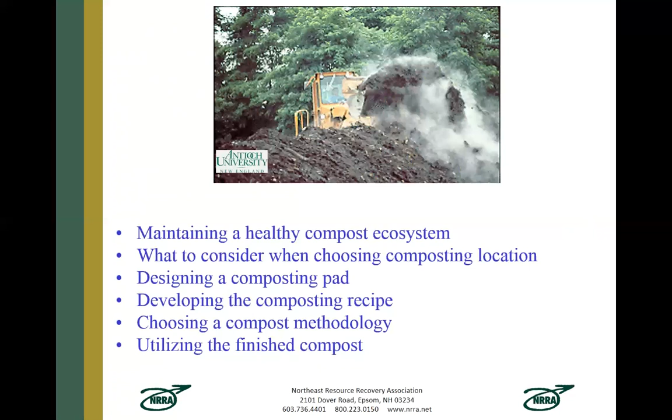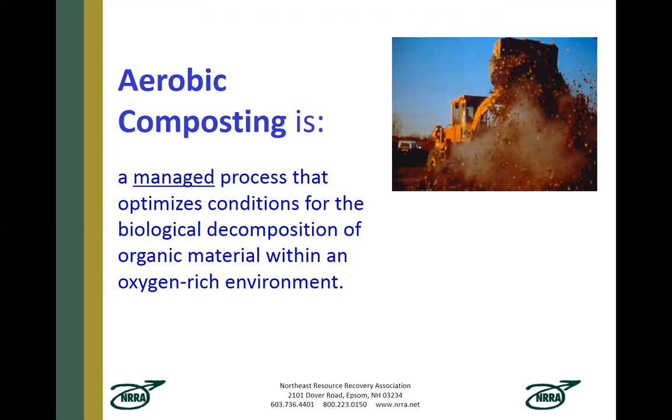But first, let's just get down some basic definitions. Aerobic composting, from a solid waste manager's point of view, is a managed process that needs to be paid attention to so that the organisms in the composting pile get what they need. In this case, it's aerobic, which means they need oxygen in order to decompose in an efficient manner. The finished product, compost, resembles a soil, but it's actually a soil conditioner. We're going to talk about how to produce it so it can be safely handled and stored, and so end users will be happy with the product.

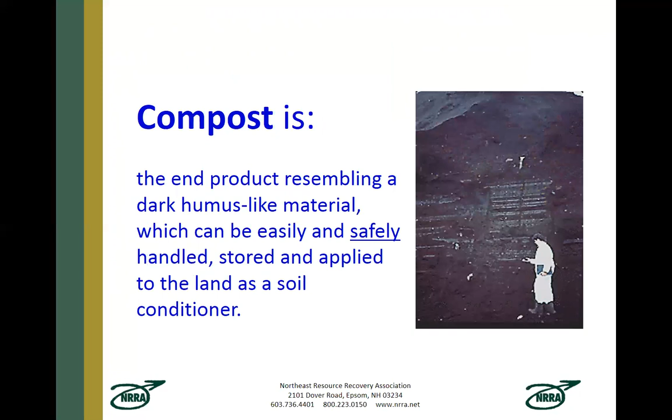Now, the organic fraction of the waste stream can be significant. And if we exclude paper, which is organic, it still could be as high as 70% of the residential waste stream.

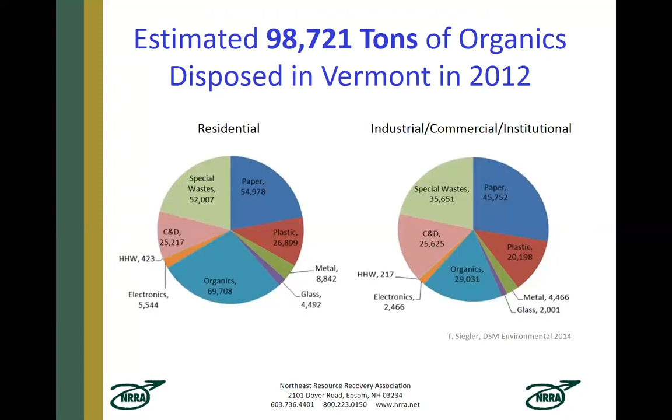Now, currently in the US, large-scale facilities that take in organics range from yard trimmings or yard waste and grass being the largest number of facilities, but in part this is because 25 states in the country have landfill bans not allowing this material to be disposed.

Of the 5,700 facilities approximately, 4%, or 225, do take in food waste already, but they mix that with yard waste also.

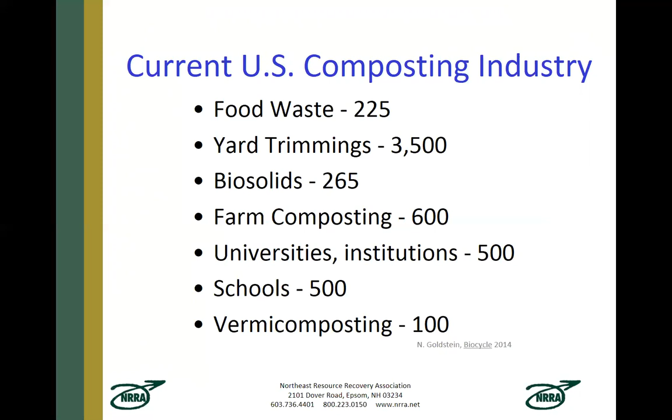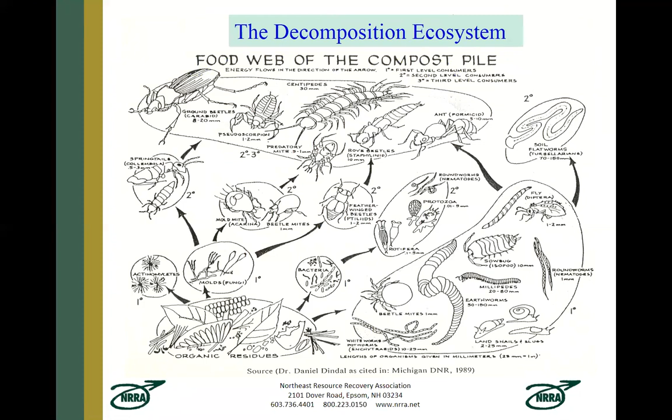Now, the most basic understanding of a composting process that will ensure that it's sustainable is that you need to realize that it is an ecosystem with a whole set of living organisms that evolves and changes over the period of the composting process.

Now, these organisms are like us. They take in oxygen, they give off moisture and carbon dioxide. And if you put them in a pile, the respiration activity, the living activity of these organisms will also release heat, and the pile will insulate the heat and it will start to get hot.

If you're composting correctly, the temperatures in the center parts of these piles should be getting up between 130 and 140 degrees Fahrenheit. This is termed the thermophilic biologic range, okay? And the organisms that can live at these high temperatures are called thermophiles.

Now, this high temperature is actually an advantage for a number of reasons in a composting operation. One, the organisms that live at these high temperatures are specialized and quickly break down substances like cellulose, which are hard-to-break-down complex organic molecules.

Also, these high temperatures will kill pathogenic organisms so that the final product is safe to handle. It also kills weed seeds, and you really do not want this in your final compost product.

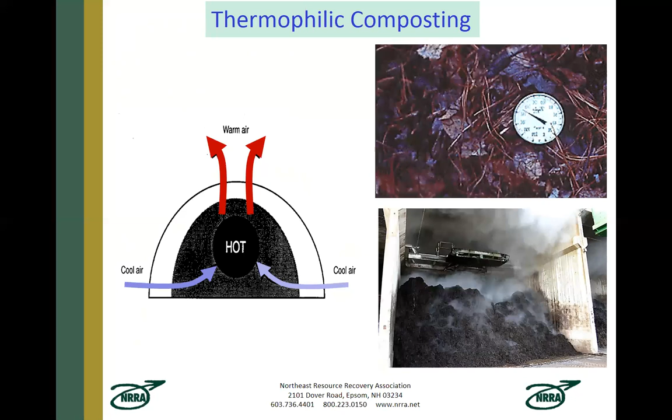And it will control vectors such as insects and flies, because the high temperatures with mixing will kill all the eggs and any pupa that may be forming.

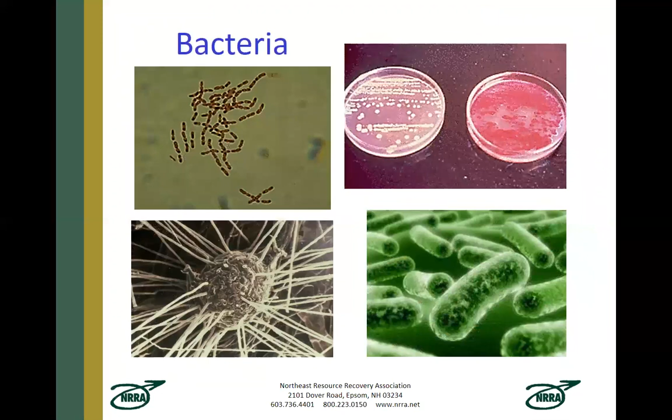Some of the organisms that are in this biological film that is inside the compost pile are fungi, many types of bacteria, and then there's Actinomycetes. It has characteristics both of fungi and bacteria, but it's actually a life form in a class unto itself.

Now, all these organisms optimally like oxygen, and they do their best job in an oxygen-rich environment, but they also need moisture because they actually live in the water film that surrounds the composting particles, and that's how they decompose them.

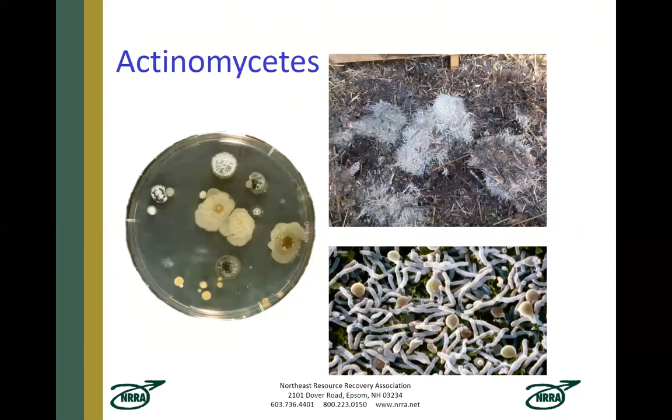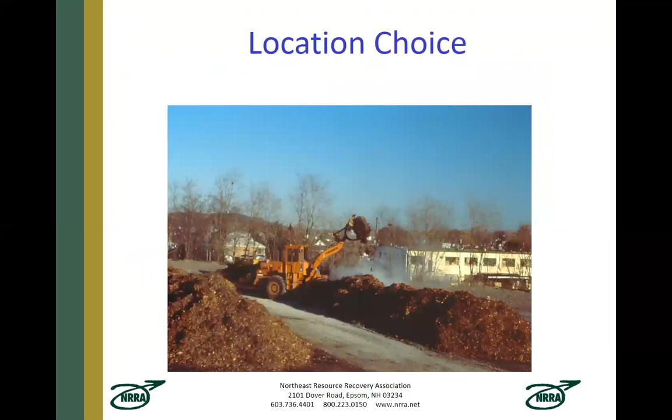So now let's get down to some practical considerations. First, how does one find an appropriate location for a composting operation?

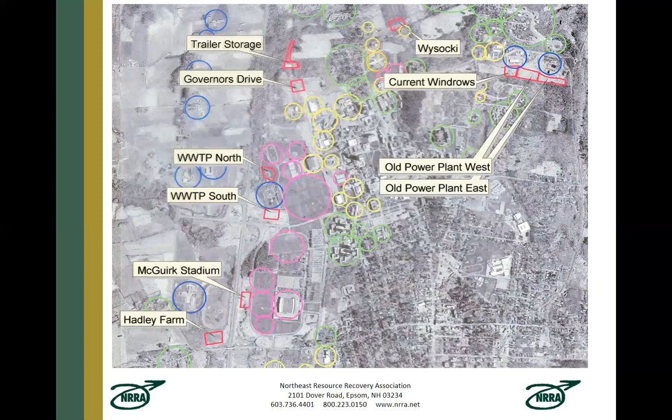Now, to narrow this list down to what we consider the final choices, we use something called exclusionary criteria. Some of these criteria reference regulatory siting requirements, such as required distance from surface or groundwater.

But also, some reflect actually context and where the development is in relationship to valued natural resources or other developed areas next door.

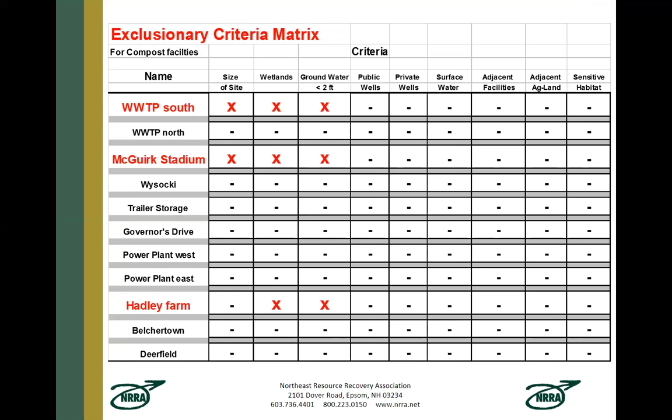The exclusionary criteria creates a short list, and then we move to a second round of criteria called preferential criteria. These criteria are developed in collaboration with a community based on the preferences.

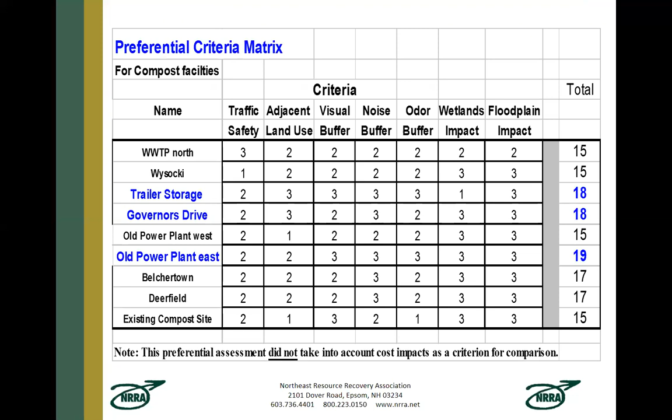And I want to focus on one of these specifically, and we'll be addressing this throughout the composting presentation. And that is the criteria of the potential of odor impact.

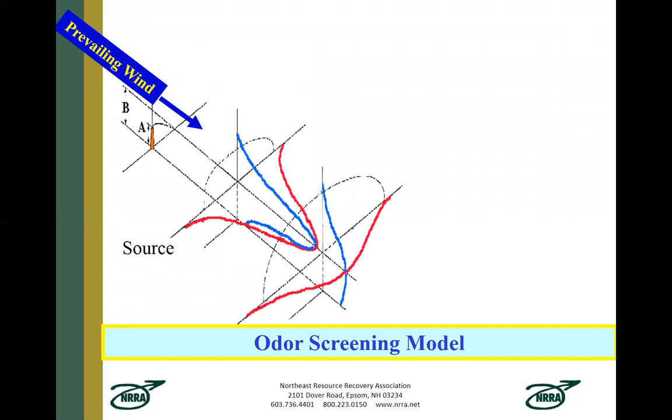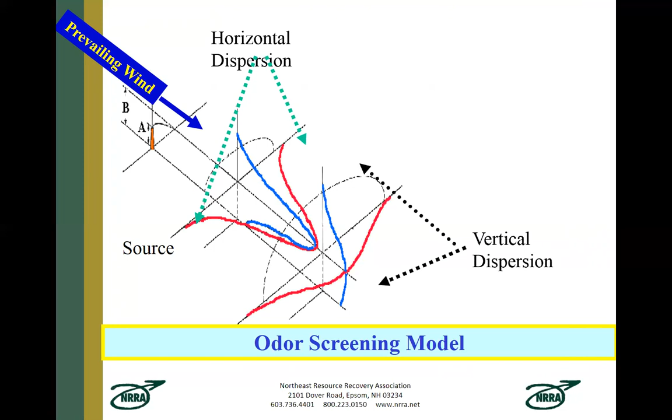All composting facilities create odor, okay, so they're a point source of odor that is dispersed by the wind over distance. So usually you're interested in where the prevailing winds are going and taking the odor.

But just because composting facilities create odor, the question is, will they have impacts? And that really depends on how close sensitive receptors are. Because over time, as the wind blows, the odors are diluted.

So what do I mean by a sensitive receptor? Well, this may be a neighbor, such as a school, a daycare facility, a hospital, a retirement community. Or it could be even a community park that is loved by many and there's many people that come to it. Or it could be a high density residential area.

So mapping out where you potentially would have such impacts is important in order to create a short list of possible sites for composting.

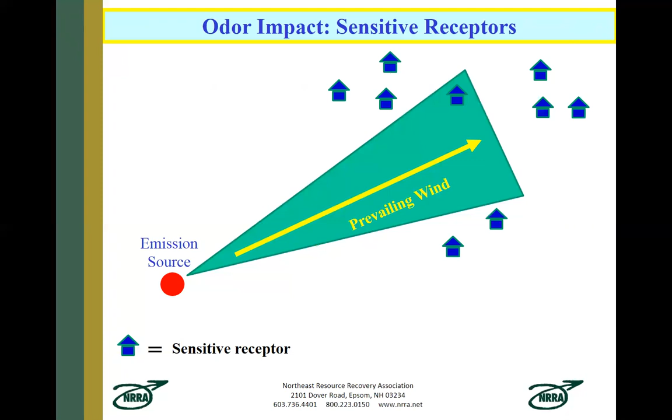So now let's turn to choosing the proper composting method for a specific site.

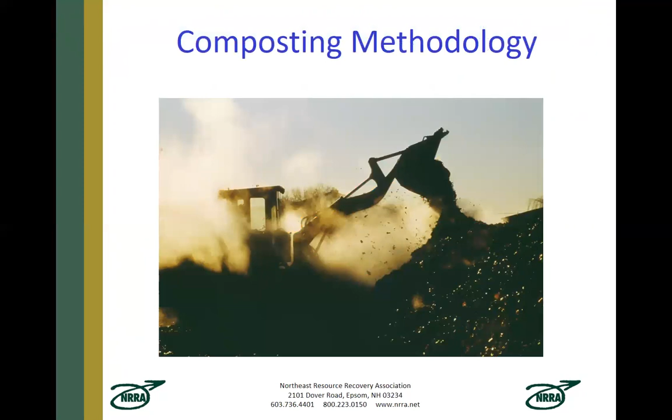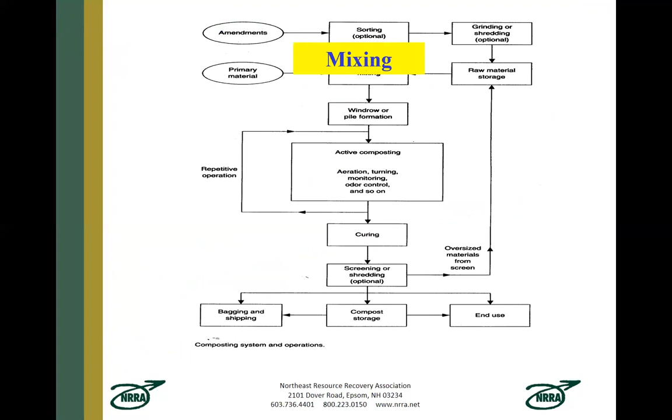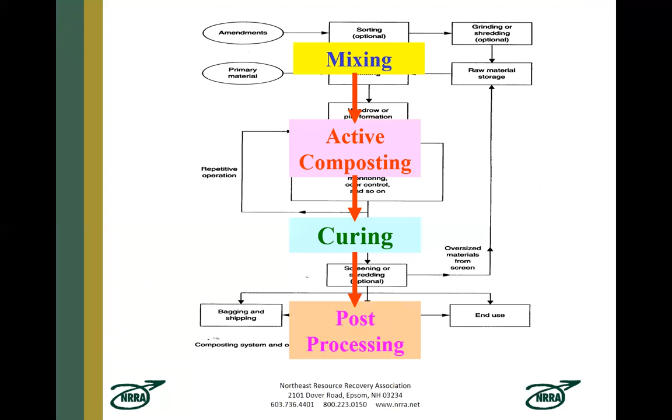Generally, all composting methods have some permutation of four steps. There's an initial mixing step where the recipe is created. There's the active composting process, which comes in many forms. There's a finishing step, what we call a curing step, that allows the compost to be at the point it can be applied to land. And then there's usually also a post-processing step, and this is really driven by the specifications of who's going to use the compost and what they're looking for in a final product.

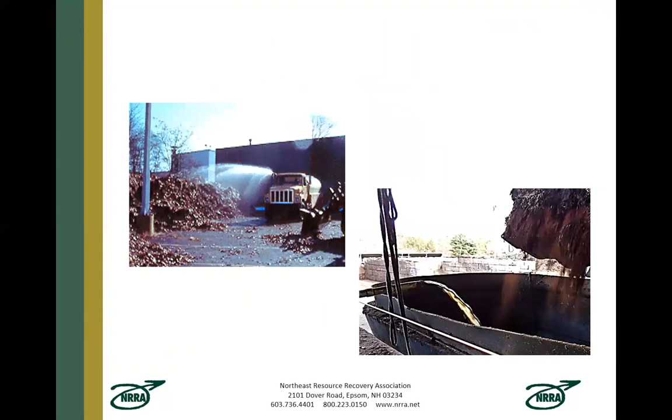Now, in the mixing step, one of the earlier challenges is balancing moisture and oxygen. As I said, those microorganisms need both. And so to really understand this, let's get down to the particle size. These are organic particles, and around each particle there's a biological water film. And it's inside those films that those organisms actually like to live, and they actually decompose the organic particles on the surface.

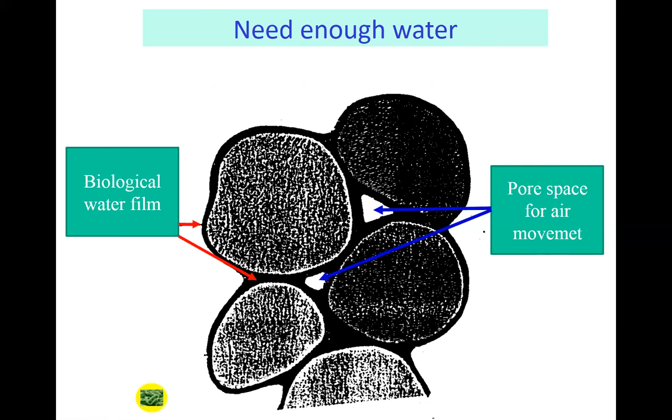So the more surface area, the faster the decomposition. But at this level, you also need enough porosity or pore space between the organic particles to allow for good air circulation. The reason being is these microorganisms are in there and they need to get oxygen to them quickly. So you need a combination of this biological water film and the proper porosity to allow aeration.

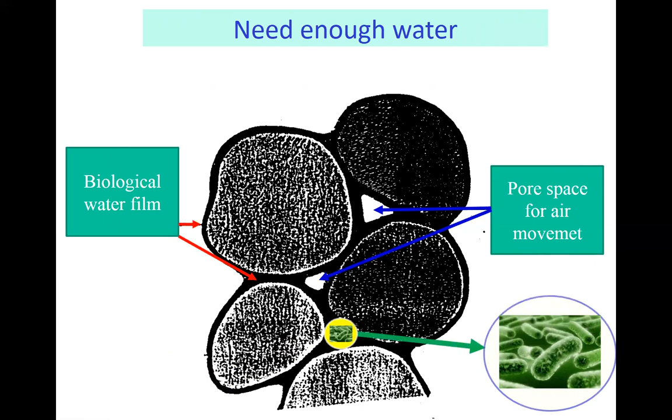Now, if a pile gets too dry, there will be no place for the microorganisms to live. And as a result, you'll see a slowing of the decomposition of these materials, and it will cease altogether if the pile gets really dry.

Alternatively, if it gets too wet, it will diminish the ability for oxygen to circulate and get to the organisms, causing the whole system to shift from an aerobic, or oxygen-rich, to an anaerobic, oxygen-poor environment. Now, anaerobic microorganisms, which can live in this low oxygen, unfortunately are not good decomposers. The decomposition process will significantly slow, and also some of these anaerobic organisms produce odors.

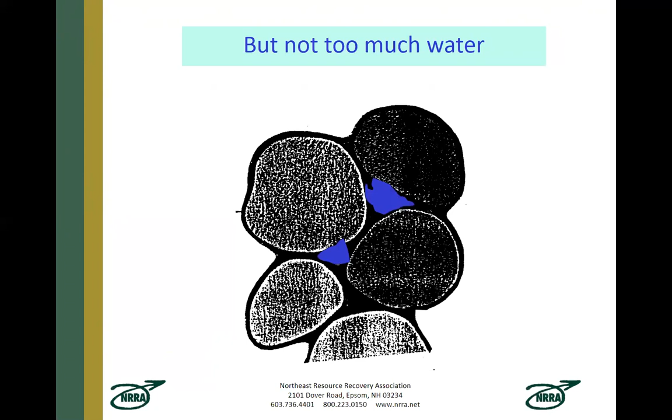So what is the right moisture content so that we get the right aeration? Well, generally you want something at around 50% by weight moisture. A good way to tell if you have 50% saturation is to grab some compost and squeeze it as hard as you can, and if a little drop of water forms at the bottom of your fist, it's around 50%. So that's a good field test.

Now, you can be within a range around 40 to 65% and still have composting occur. 50% is where it's most optimal. But if it drops below 40%, it's going to slow because it's too dry and there's no biological film. If it gets above 65%, there's not enough porosity because all the pores are filled with water, and you'll move into anaerobic composting. It again will slow, but in this case, you'll get odors.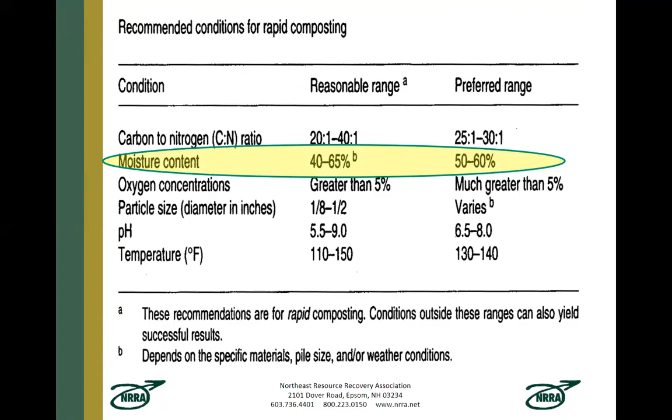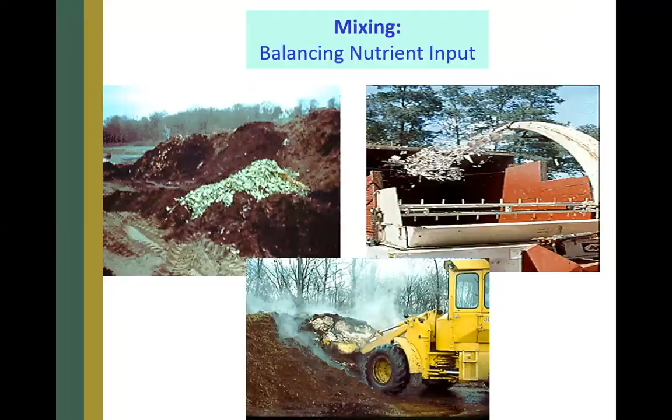Now, another challenge as you create the recipe to put in a composting pile is to make sure you get the right nutrient balance. And really, what we're looking at is two major nutrients: carbon and nitrogen. Now, the carbon provides the energy for the microorganisms to do the work, and so if you have enough carbon, they have enough food, and you're going to see good decomposition. But at the same time, they need enough nitrogen, which are the building blocks of life for these organisms, so they can grow, reproduce, and actually have large populations, so the decomposition rate is quite fast.

So you need an ideal carbon-nitrogen ratio. And you can see, looking at this list, that it can vary quite a lot, from something like wood, which is 700 parts carbon to 1 part nitrogen, all the way down to something like food waste, which is 15 parts carbon to 1 part nitrogen.

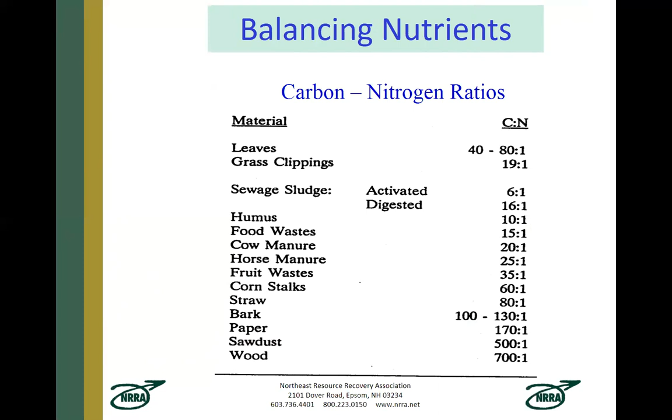So what is the right ratio? Well, to do that, you bring in different types of organic waste and you mix them so you can try to get an ideal mix ratio. And that is, you want something around 25 to 30 parts carbon to 1 part nitrogen.

Now, if you get more carbon, if you get greater than 40 parts carbon to 1 part nitrogen, you have a lot of energy, but you don't have a lot of nitrogen in order for those organisms to reproduce and the populations to grow. So you'll have a slow composting process, and materials will have to be on site much longer.

However, if you have something less than 20 parts carbon to 1 part nitrogen, you actually don't have enough carbon. It will be used up really quickly, and the piles will get hot. And as a result of the hot piles, the excess nitrogen will turn into nitrogen odor compounds, and you'll get odor release.

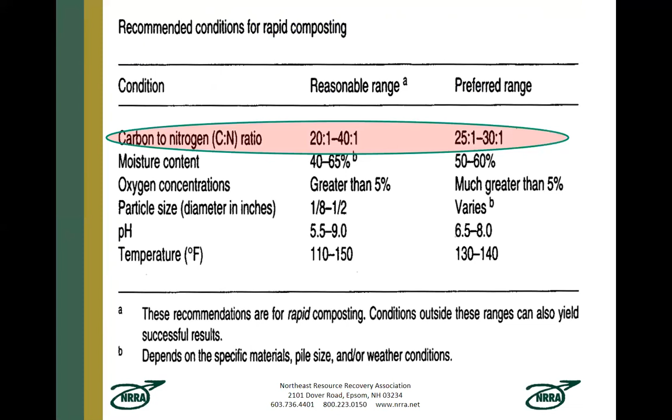You want to avoid being above 40 and below 20 parts carbon to nitrogen in order to have an efficient composting operation and to avoid odors.

Once you get the materials mixed and in the piles, what is the right methodology for composting? The choices you'll make are: how do you want to aerate that material? How do you want to ensure that oxygen stays in that material? There are many ways of doing that. How do you want to continually mix the piles? Because you want to make sure hot temperatures touch all parts of the material at some time.

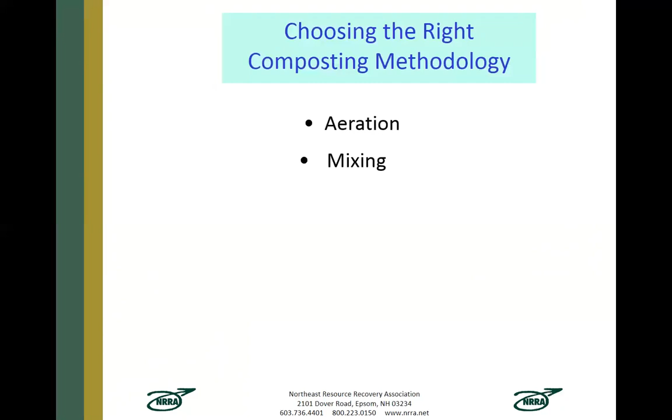Do you want to size reduce? Remember, decomposition by microorganisms is a surface phenomenon. So if you increase surface area by making smaller particles, it will speed up the composting process.

Obviously, seasonal issues and changes in droughty and wet conditions, as well as hot and cold conditions, are important to consider, especially here in the Northeast. And then there are site constraints. Once you've chosen a site, you're limited, and you'll only be able to accept so much material based on the composting method you choose during the year.

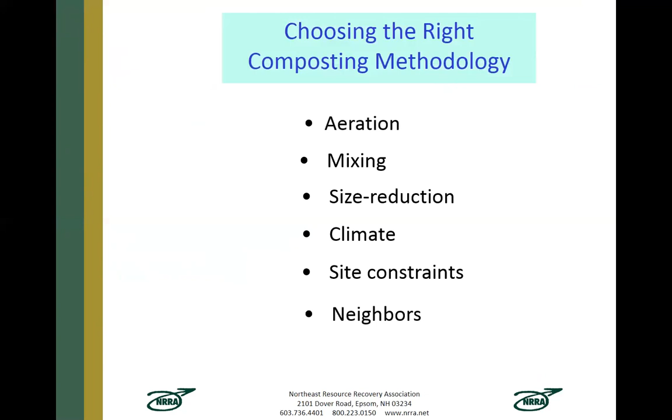And then, as I said, what is the context? Where is this facility located? And what do you need to do to make sure there are no impacts emanating from the facility that could affect your neighbors at some distance? Obviously, cost is always a consideration, but it's really related to all the decisions above that you make about the composting operation.

Most people are familiar with this type of composting, called windrow composting. You put your materials in a long row and use a piece of equipment to turn it. Most communities have something like a front-end loader. Operating a front-end loader with a windrow system, it's important how you turn the piles.

Not only are you releasing the carbon dioxide and water vapor, the byproducts of aerobic respiration, but you're also getting oxygen into the pile and mixing it so that everything is at some point at the center in a thermophilic range. Now there is specialized turning equipment.

Some are attachments, such as this Wildcat turner, and it can be pulled with anything that has a PTO drive. What it does that a front-end loader can't do is size reduce and increase surface area, allowing a more rapid decomposition process.

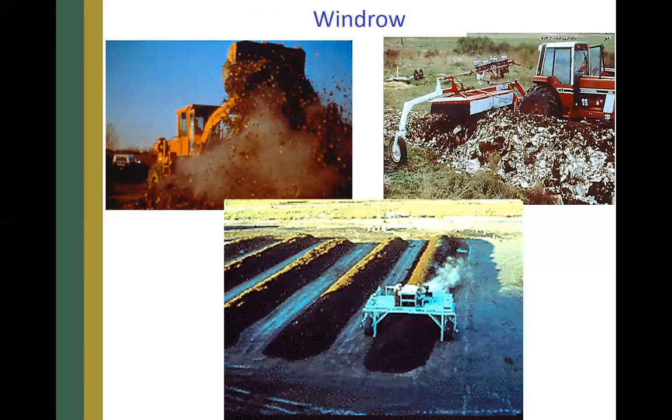You can also have self-drive turners, such as the Scarab at the bottom. They do the exact same thing as the Wildcat, but what's different is they can compost larger operations efficiently, and they have the capability of adding water to the pile as it's being turned, in case you need to do that.

There are many what we call static aerated pile systems, where you're actually only turning the pile maybe once, and you have two phases: a phase one static aerated pile, and then you flip it into a phase two.

You put down pads that have pipes — they can just be plastic pipes with holes — and then you put the material over it. These pipes are attached to a blower. So if you're going to have a static aerated pile system, you'll need an electric source. These blowers blow air through the pile, or they can suck air through the pile, depending on the time of year.

Often they're covered with something, either a geotextile or what's now called a gore cover, which allows carbon dioxide and moisture to be released from the pile but limits the amount of rainfall going in. But most of them use finished compost — they'll put about 2 feet of finished compost on top of the piles, and the compost insulates the pile so the whole pile is now in a thermophilic range, that high temperature range, allowing rapid decomposition.

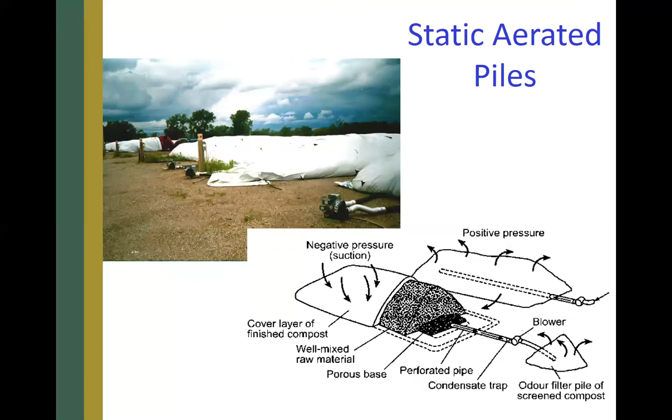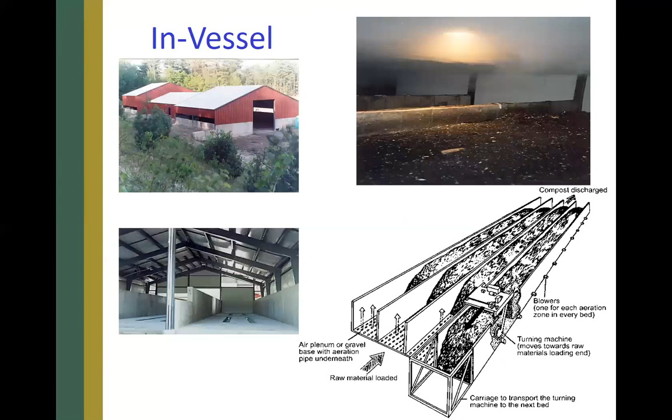What's interesting about an in-vessel system is that you can actually capture all of the emissions coming off that pile, including odors, and route this material through what we call a biofilter. It's another biological system where bacteria clean the odors out of the air. This is a great alternative if the only site you have is right next to some sensitive receptors.

The appropriate sizing of a site is really driven by how you start your decision making. One decision is that you've chosen a site because that's all you've had, and that immediately drives how much material you can bring onto the site, how fast it decomposes with the methodology you choose, and how much storage capacity you have before you have to start moving materials off the site.

So starting with the site limits, the material being accepted. Or you can decide that you need to serve a certain waste shed, which determines how much material you'll handle. Then you look for a site with a certain composting methodology in mind that's large enough to handle an annual amount of material coming on and getting the compost off the site.

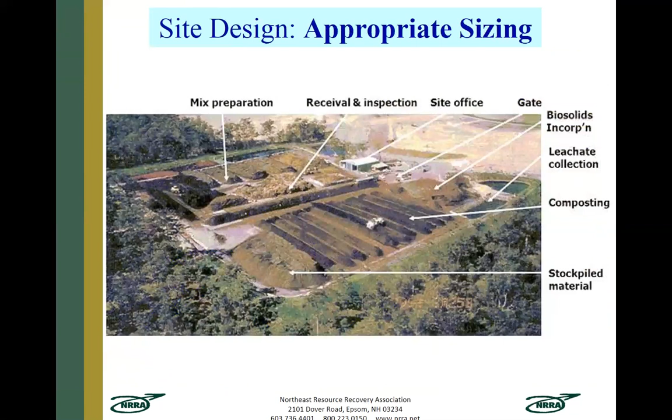Because of the configuration, you need to be aware of that. Ideally, what you want is a system where materials run in a circular pattern, not a long linear serpentine site. Materials going in circulate, and materials going out are pretty close to where things come in. So you should think about how you site things to minimize materials handling and operating cost.

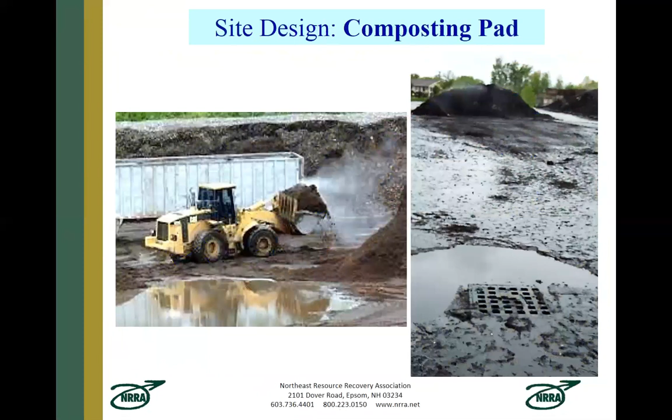Now, once you have your site location configuration, what you really need to focus on first is where to put the composting pad and how to design it. You need a composting pad that operates in all seasons of the year. One of the major issues around a composting pad is that you need to avoid standing water.

If you have water next to a composting pile, it will soak up that water like a sponge. The bottom of the pile will have all the pore spaces filled up with water so oxygen can't get in. As I mentioned earlier, you'll move from an aerobic set of organisms to an anaerobic, oxygenless set of organisms, and as a result the decomposition process will slow significantly and you'll get odors.

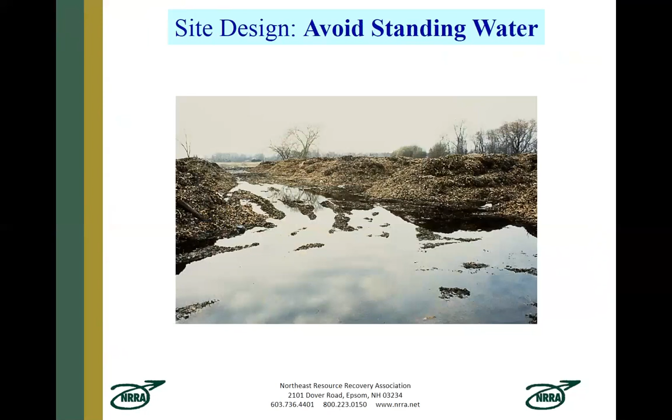I'll add that any puddles near a composting operation for a long time will also become an odor-generating source every time a piece of equipment runs through it. So building the pad correctly is really important to avoid future problems.

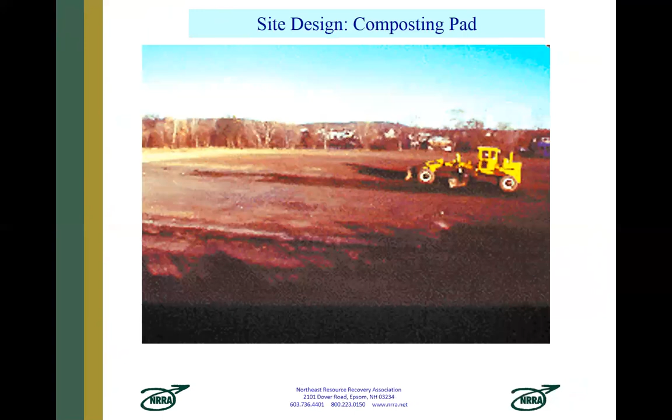There are some pretty simple rules of thumb. You basically want a pad that will support equipment year-round. You definitely want it to shed water away from the composting pile, so it should have a slope of 0.5% to about 1%, so the water can run through it. And you want to make sure the pile is set up parallel to the fall line, not across the fall line, so water can run between the piles and not into them.

You want to always avoid standing pools of water, so you need to have maintenance. And you want to make the pad out of a material that is not going to be a contaminant to the final end product.

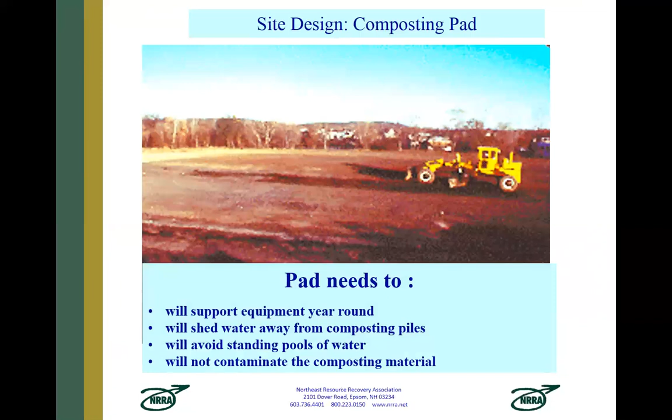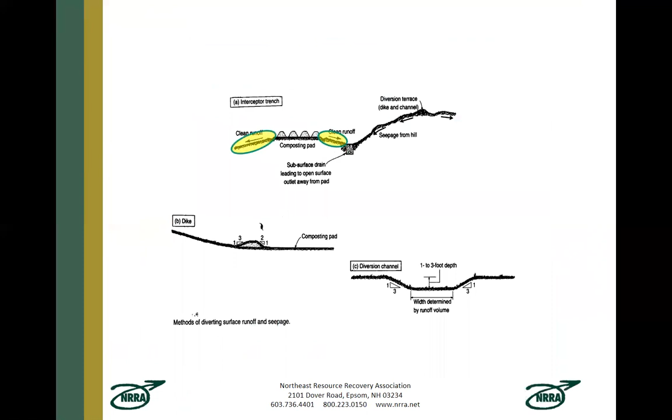Now, just some very simple guidelines when dealing with the pad, the contour, and the location. One, it's good to raise the pad above the surrounding natural contours and allow the water to shed off the pad very quickly. If there's any possibility of runoff entering the site from upslope, you should create either a dike or a ditch to divert the runoff around the pad so water doesn't run across it.

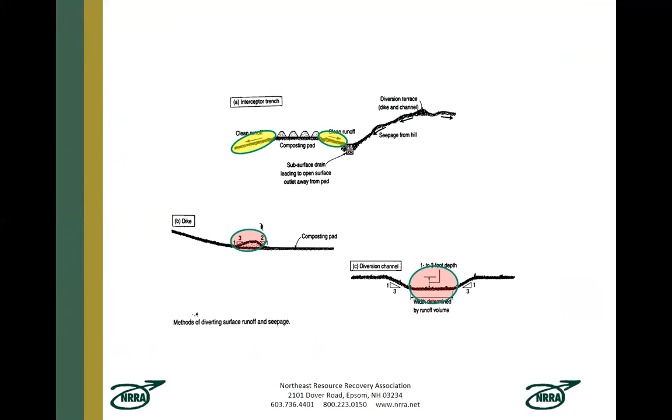And finally, do not site the pad in a location where there is seasonally high water, evidence of a wetland, or shallow to bedrock soils. If you do, you'll run into future problems unless you raise the elevation so the pad is significantly above those restrictions. It should be at a minimum 2 feet above the restrictions, but ideally 4 feet.

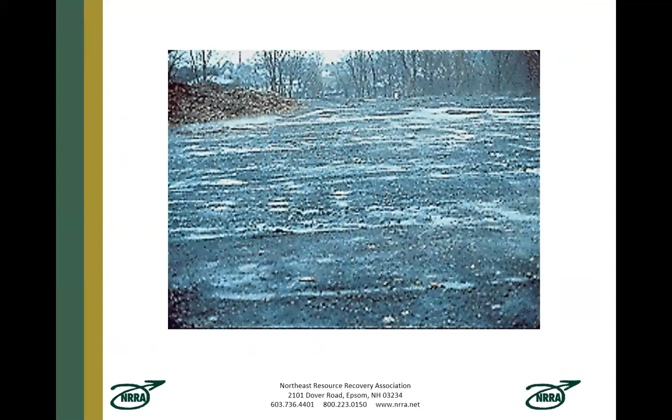Now, this is a well-designed pad. You can see there's some ponding of water, but this was taken during a very intense rainfall, and within 2 to 3 hours, there was no water on this pad.

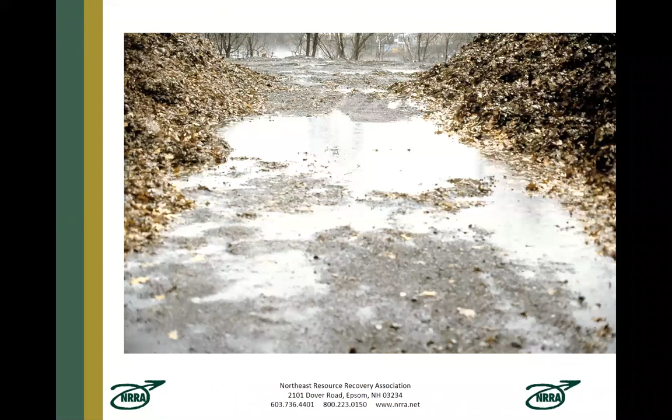Now, over time, pads actually do get rutted. You do have low areas, so it's important for periodic maintenance to maintain the pad so that the water will not stand and cause anaerobic conditions in the pile.

Now, one of the things we think about in managing the process is what is the throughput rate. The throughput rate is the time the material remains on the site, that is, the time period from it entering the front of the facility and getting the final compost product off the back end.

Now, the throughput rate is really driven by a number of things. One is at what rate the material is arriving, because that drives how fast you need to move materials through the process. Also, what is the length of the active composting and curing process, or the finishing step? That's important, and it's driven by the specific methodology you choose.

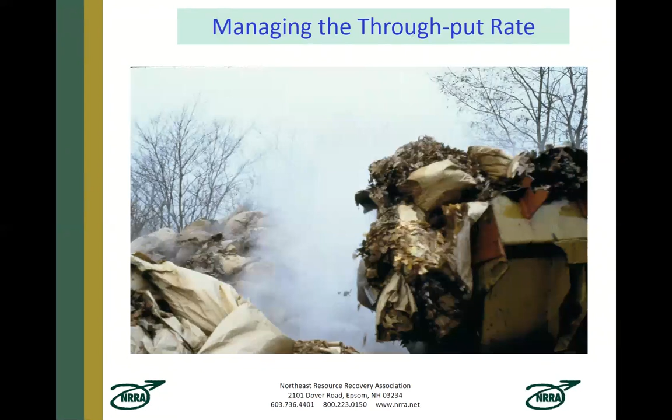And finally, you ultimately have a site constraint. You have a certain amount of area on the composting location, so you need to ensure that the throughput rate is reflective of the total area so you do not get a buildup of material and a backing up of the process on site. So be cognizant of how materials come on site and what you're going to need to do in order to get them off the site.

So the throughput consideration - probably the most major factor is choosing the appropriate composting methodology. And so if you have site constraints, you may have to choose a methodology that speeds up the decomposition process. If not, you're going to have to slow down acceptance of material at the site.

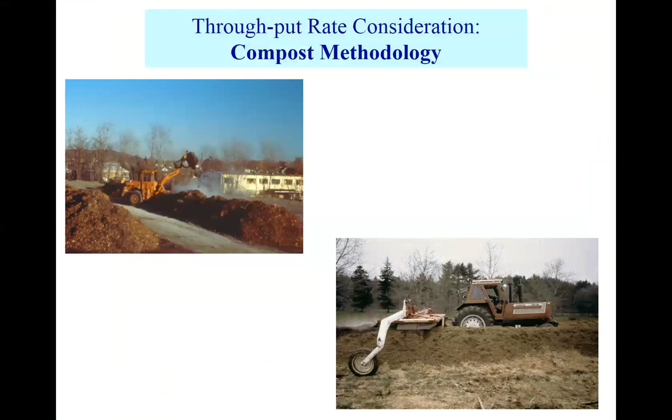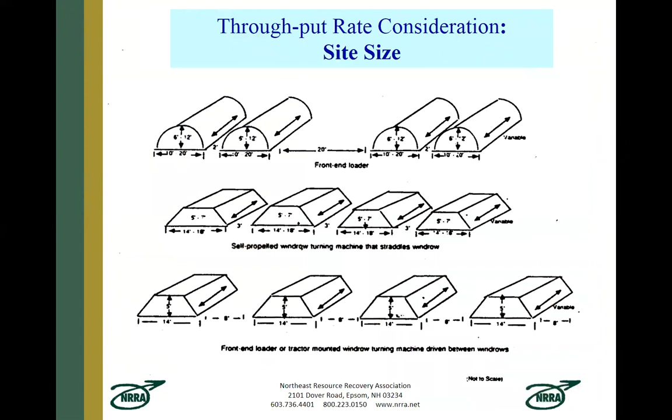And you're going to have to manage your materials during the composting process, such as combining materials as they decompose into larger piles so that you're freeing up space for new material to be built into new composting piles.

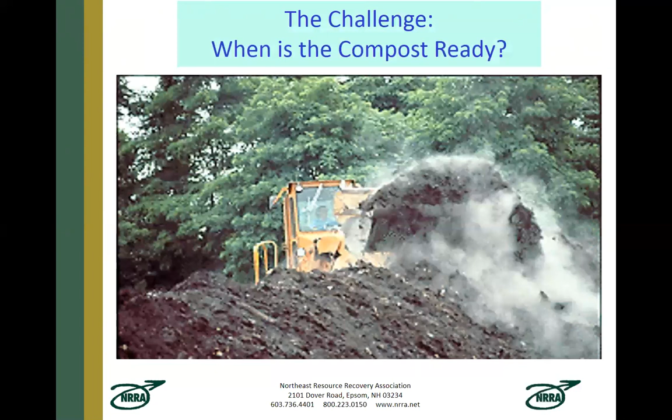So once you have the materials in your composting, the question is, when are we done with composting? When is it ready? How long do we have to compost? The key to this is really monitoring, using temperature - you can also use oxygen, but temperature is probably the best way to monitor the health of a compost pile. In all parts of your pile, you want to have thermophilic temperatures, so you need to continually monitor the piles.

Now, if the pile temperatures are going down, it's either because you're done composting, but if it still looks like it's not soil, then you're not done. Well, the temperature could go down because you don't have enough moisture, you have too much moisture, or you didn't really make a good mix of material, and you may have to remix it. Using the temperature and recording it so you can look at trends over time is important.

Especially if you have multiple windrows or multiple static aerated piles - they're going to be composting at different rates, and they're going to be in different stages of decomposition. So you need to monitor all those piles periodically.

And you should be able to compost right through the winter if you design and operate the facility correctly. If you don't operate through the winter and haven't planned for this as far as the size of your site, then the throughput rate is going to be diminished because you've cooled down the piles - it's not composting at the aerobic stage of high temperatures.

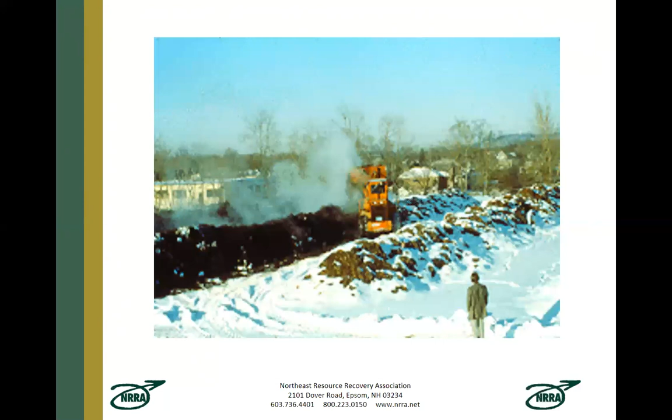But experience has shown time and time again that when such shortcuts are taken, it will eventually lead to closing of the facility. This is either because regulators come in, since you've created a lot of impacts, both environmental or nuisance conditions, and they'll shutter you. Or you're creating a quality of finished product that you've got to get off the site, but it's not done, so it won't really be marketable. Or you're increasing the cost of dealing with the material backing up, and those costs are much higher than whatever you budgeted for.

Now, for a well-maintained composting process that occurs throughout the whole year, assuming you maintain good compost pile moisture, you're getting good aeration or oxygen throughout the whole composting process, and you create a good mix at the beginning of nutrients.

The pile temperature starts to cool because the material no longer looks like the organic material. It's now looking like a soil product. And it continues to drop. You've turned the pile or aerated it, and it still continues to drop. Well, you're getting towards the end of the composting process.

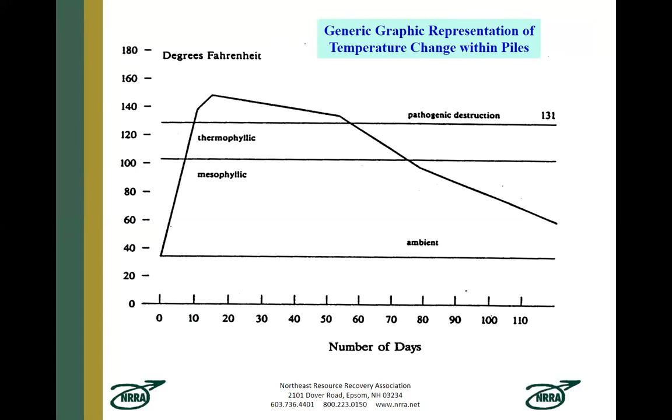Now, once its temperature is back down to ambient temperatures, that is, the temperature of the surrounding atmosphere, you still need to let it rest. We call it the curing period or the finishing step. This allows for the reinoculation of the finished soil product with organisms that are compatible with soils, what we call the mesophilic organisms. So you need to allow it to cure, and we call this to allow it to stabilize or be stable.

Now, if you move material off your site and give it to someone before it's stable, and they apply this unstable compost to their lands, this compost still wants to finish breaking down. So it's going to rob nitrogen from the soil, competing for the nitrogen that the plants growing on the soil need. Plants will either be stunted or killed. This is especially true for seedlings, which cannot compete with the compost for nitrogen.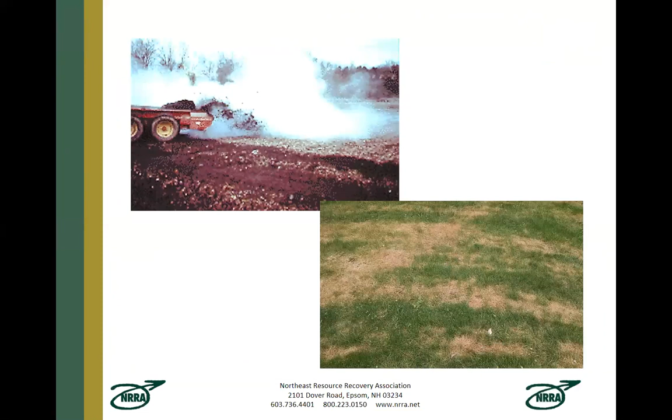Also, if the unstable compost is still high in organic acids, it can actually burn vegetation if you broadcast it onto it. So it's important to have that curing step in your composting process, and you need to plan for that time of the material stabilizing.

Now, when you get a finished product, the question is, who's the client? The marketability of the compost, like recyclables, is determined by the specifications of a particular end user. But unlike a materials recovery facility, a MRF, that takes recyclables and prepares them for a manufacturer where the manufacturer is the end user, the composting facility is both a materials processor and the manufacturer, thus creating the final end product for consumption, either wholesale or retail.

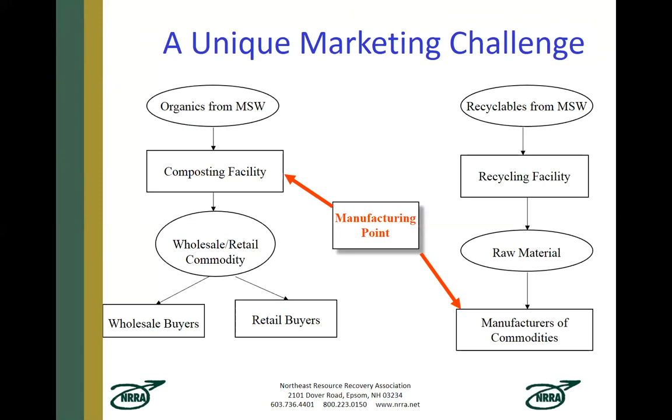So once you've created a stable finished compost, you must find a home for it. You don't want it to start backing up and taking over areas of the site that you didn't plan on, thus taking shortcuts to deal with lack of site capacity.

Now, there are a number of marketing considerations that drive the post-processing step at the composting site, and the post-processing step is driven by market specification. But you can decide, well, do we create a bulk product that's lower grade

for the larger bulk markets, such as land restoration, erosion control, landfill final cover, ball field construction. All these markets will pay for the material, but they'll pay a relatively low price. However, your post-processing costs are minimal in order to produce this product.

Or you can decide to create a blended final product for very specific horticultural or agricultural markets. They'll pay a high price for a good quality product, but the post-processing costs are also increased. Or does the facility do both? Whatever the choice, it is inherently critical that the material is moved off the site in a timely manner so it doesn't back up.

At a minimum, the post-processing is to ensure that the compost product looks like a soil product, that is, it doesn't have contaminants or visible contaminants in it.

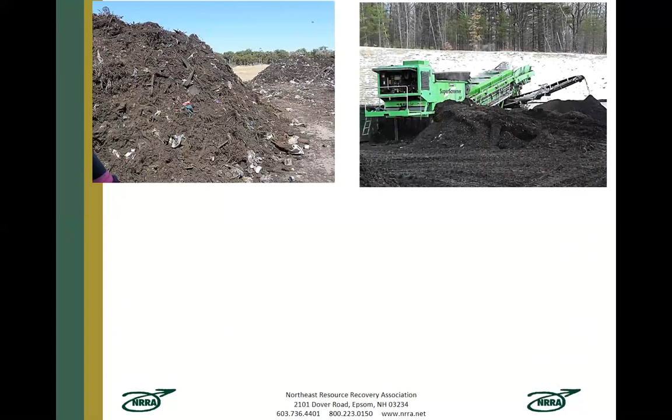One way to deal with this is, at the front end of the facility, to only accept certain types of material, thus minimizing contaminants coming in. Alternatively, at the back end, you can screen out your materials, removing those things that end users would definitely not like to see in the final product.

But such screening might also help make the material look more like soil. This is a finished compost product. It's stable, but it's sort of clumpy because it had a high percentage of leaves and yard waste in it.

So if you have a certain market that's not looking for a mulch, but is looking for something that looks like soil, you're going to need to create smaller particles from the larger particles.

Well, one way is you can pound or pulverize it, and you can do that with the choice of the right screen, so that it basically can screen it. The other thing is you can just not have any kind of size reduction and just have it screened into two size particles.

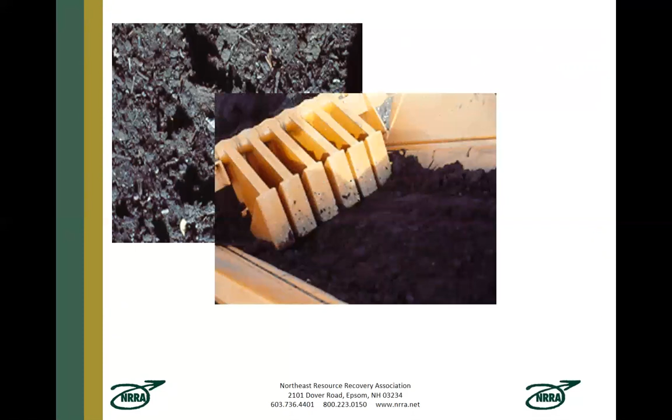The fine particles are the ones you would sell to the end user. The larger particles would be reintroduced into the composting process at the front end and would continually get smaller as they go through the process a second time. So really, we're looking for something like this, whether it's a high-end horticultural or agricultural blend, depending on what else they want in that material, such as types of fertilizer and nutrient.

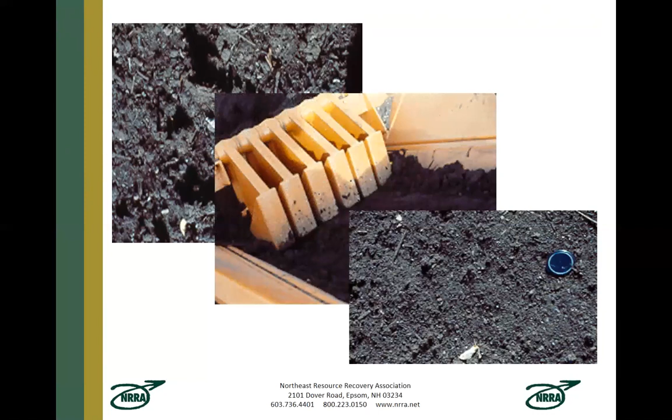As I mentioned previously and stressed throughout this presentation, odor generation is a major issue for management of a composting facility, and it is the major reason facilities have closed historically.

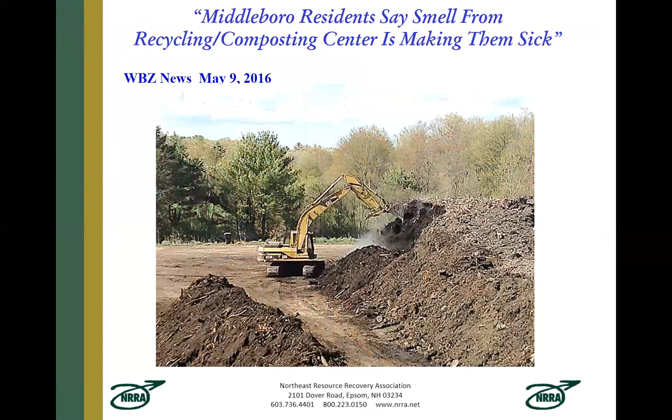Paying attention to a number of issues, realize odor generation is often a result of site constraints and shortcuts that managers take. Ultimately, what shuts down a composting facility is that they did not design the site correctly. They chose a too small site, or may not have chosen the right composting methodology to get the highest throughput rate. As a result, they have high costs and very low revenues from a poor quality product. Thus, facilities that closed because of odor ultimately closed because they didn't have the financial resources to correct the problem.

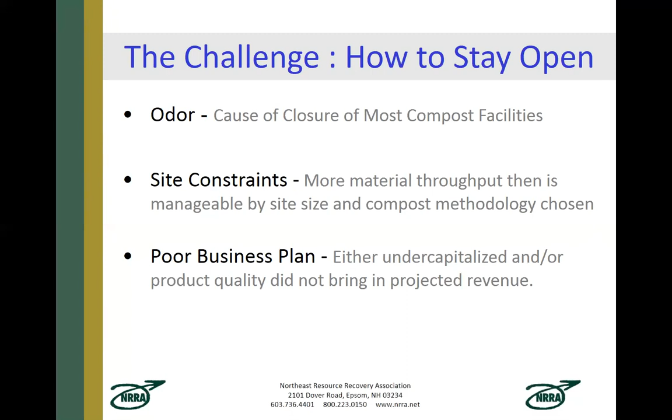Now let me close by turning to food waste. Food waste is sort of the last frontier for composting, and it's a significant part of the waste stream.

What we're seeing now is a trend developing, especially on the west and east coasts of the U.S., where food waste is being banned from disposal in landfills. In our neck of the woods, the states of Vermont, Massachusetts, and Connecticut have already enacted legislation over the last 4 to 5 years with the intent to add food waste to their already current leaf and yard waste bans for disposal.

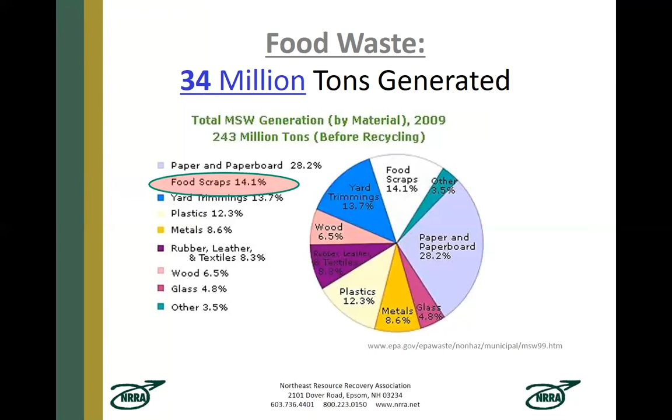From a compost operations point of view, what is clear is that when food waste is added to an already-existing leaf and yard waste municipal operation, the management, monitoring, and record keeping of that facility will need to step up to a new level. And there are a couple of other challenges that need to be considered.

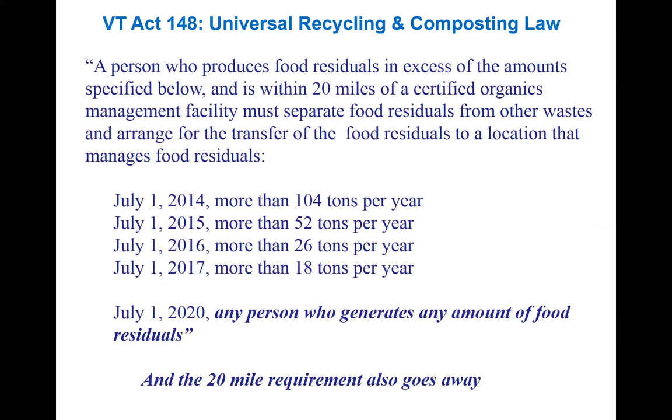The acceptance of food waste means you're going to be accepting the packaging along with the food waste, and there needs to be a way to deal with that, either before the material gets to your facility, or at the facility itself, at the front end, the back end, or both, for the composting process.

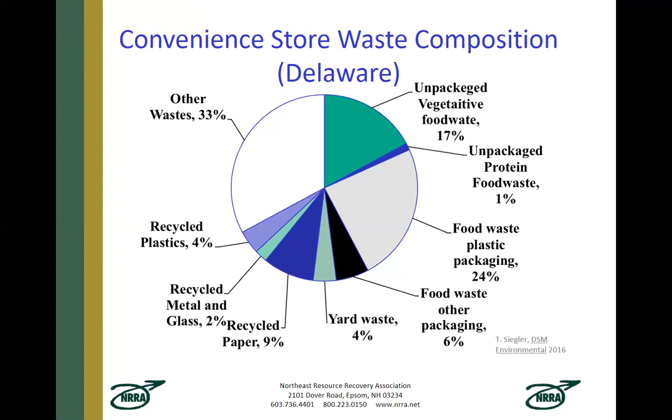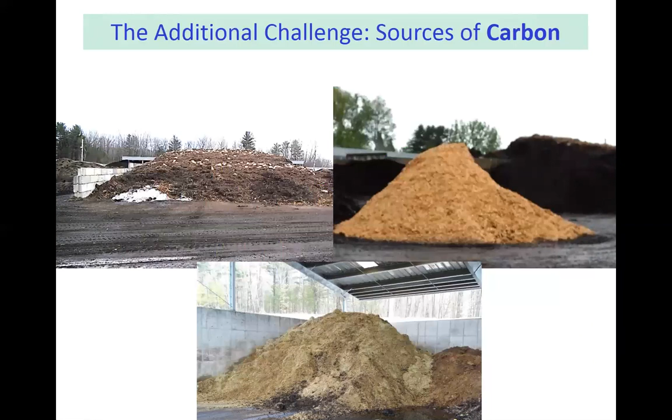So that's it. There'll probably be subsequent trainings with more specifics about operations, management, record keeping, monitoring, and marketing of the compost. But for now, we're done, and I want to thank you for taking your valuable time to build your knowledge about the steps to site and operate a composting operation in a non-impacting manner.